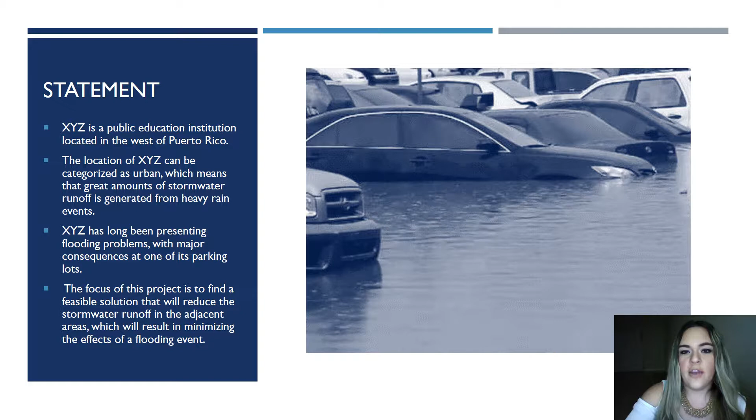Where XYZ is located is considered a dense urban area, and this is an important fact for the analysis of this problem. The objectives of this project were to determine the physical or structural feasibility of locating the green roof system on top of the existing structure, and to determine if it is economically feasible to implement this system.

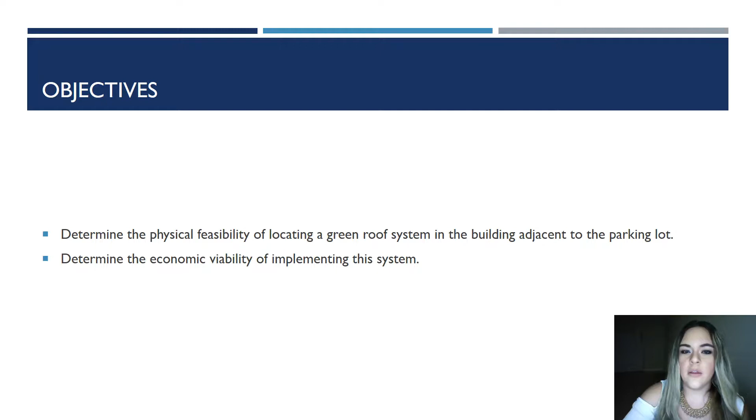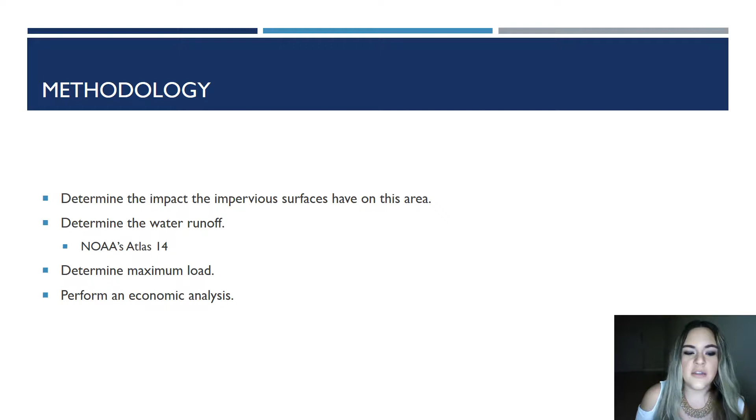The methodology that was followed was to determine the impact that the impervious surfaces have on this area, to study the water runoff, the load capacity, and to perform the economic analysis.

On this slide, the project timeline is shown, and as can be seen, we are actually at the end of the project right now.

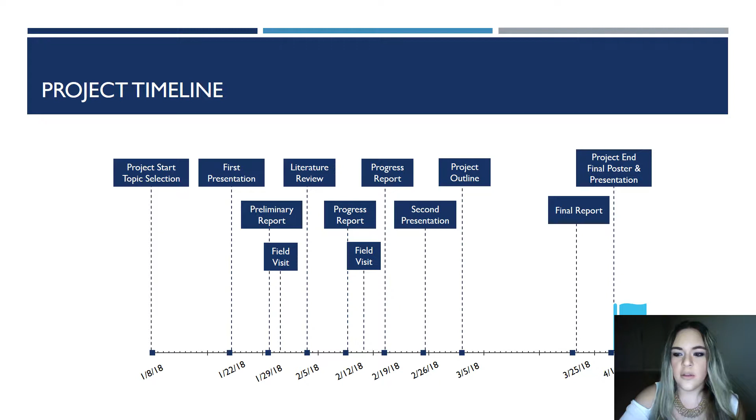As mentioned previously, impervious surfaces create a problem not only at XYZ, but this is a problem seen island-wide and worldwide, with the construction of new roads, buildings, etc. Surfaces become impervious, meaning that water cannot infiltrate through it, and this creates flooding issues. It is important that institutions start taking part in this problem and managing the water that their structure is generating.

There are many ways of addressing this problem. However, in this case, only the green roof and the rainwater harvesting systems were considered.

When a system of this type is implemented, a delay in the water runoff is created when compared to a bare roof. This is shown on this graph. A time gap between the peak runoff is created, and this happens because the water is being retained by the system.

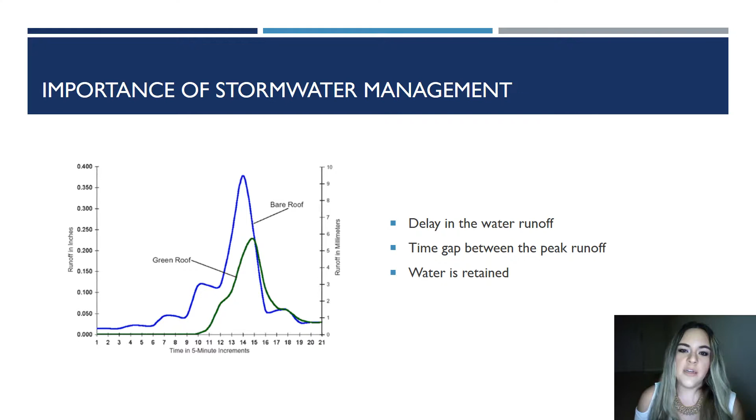As I already mentioned, the green roof and the rainwater harvesting systems were the only ones considered. A green roof is a green space created by adding layers of growing medium and soil in order to absorb, retain, and reduce stormwater runoff. It has many benefits, such as noise reduction and temperature moderation. It could be used as a recreational space, and it could be used to grow plants that could be resold, among other things.

There are two types of green roof systems: the extensive and the intensive. Intensive green roof systems require a bigger structure because they are intended to be like roof gardens and a recreational space, whereas extensive green roof systems are only for the purpose of retaining water, which was the type considered in this project.

A rainwater harvesting system is just a system that collects rainwater and stores it for later use.

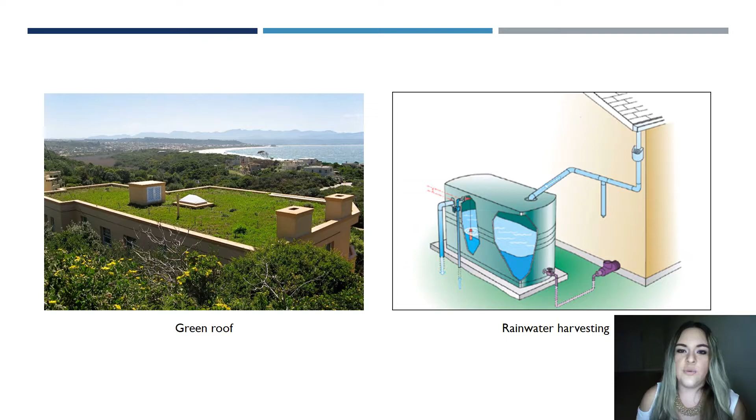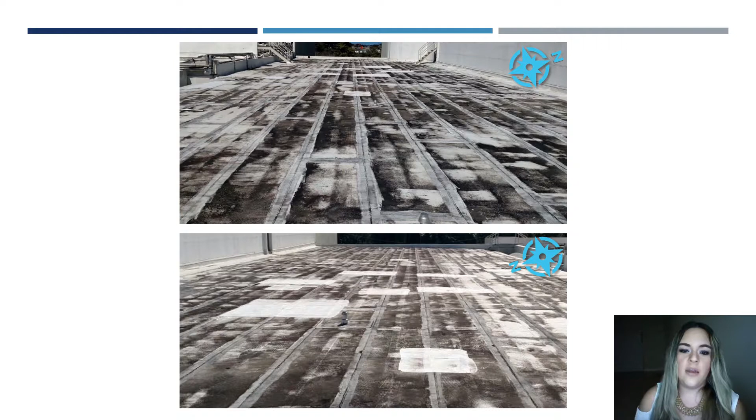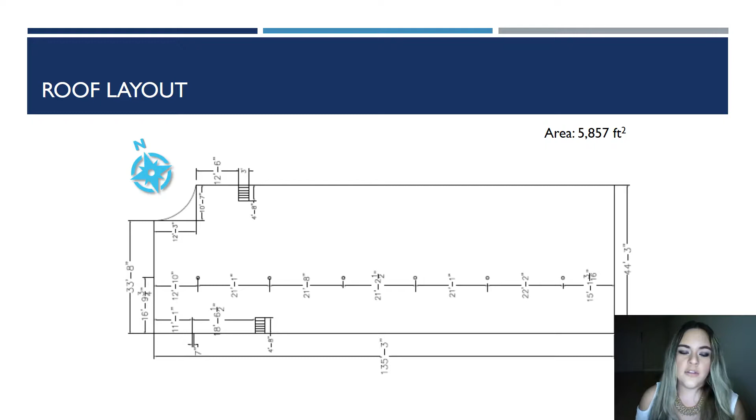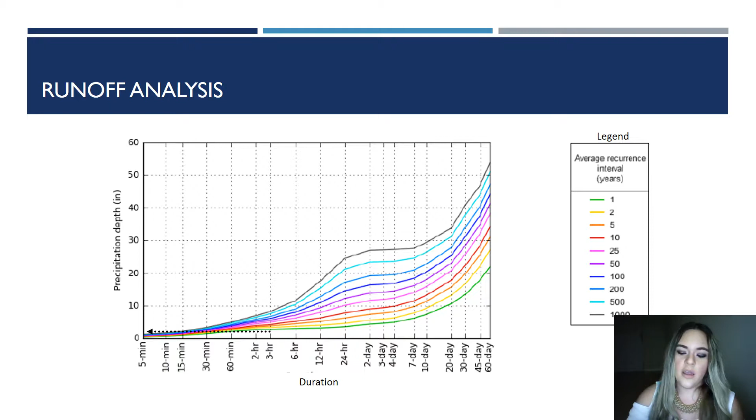It's a little difficult to see from this graph, but Atlas 14 also offers the tabular method, and for a 2-hour event, it would represent 2.62 inches of rain.

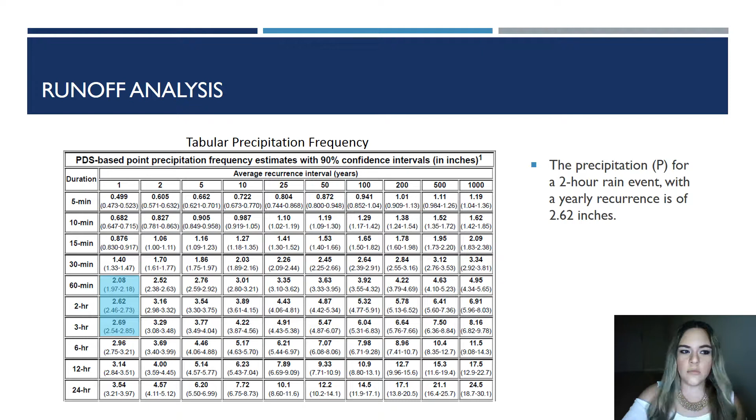A second field visit was conducted during a rainy day to measure the water retention and see how the roof was draining. It was determined that 105.6 gallons could be collected per hour. This was not very heavy rainfall, so during September and October, a lot more water could be caught.

This was based on a 50% catch of water. Based on this, the rainwater harvesting system could be used for irrigation purposes.

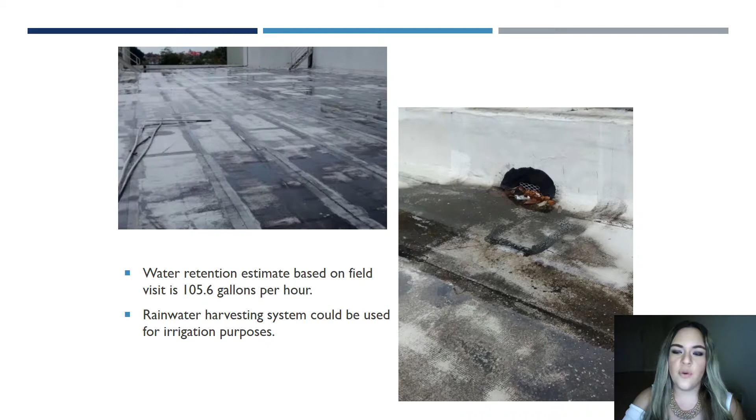Therefore, the rainwater harvesting system being proposed would use a 1,000-gallon tank that would cost $559 plus tax and shipping and handling from plasticmart.com.

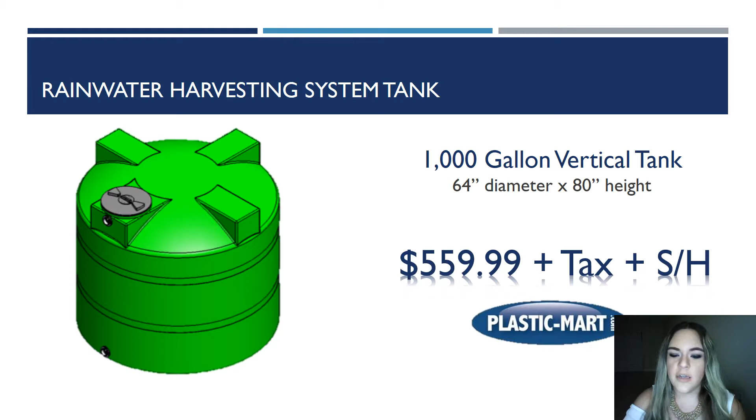The roof load capacity was carried out, and the parameter used to determine if it would be feasible to locate the green roof was the deflection. The deflection was calculated in two ways: the maximum deflection with the roof as is, and the deflection with the weight of the green roof.

The maximum deflection formula is shown there, and the value obtained was 1.43 inches for a slab of 21.5 feet.

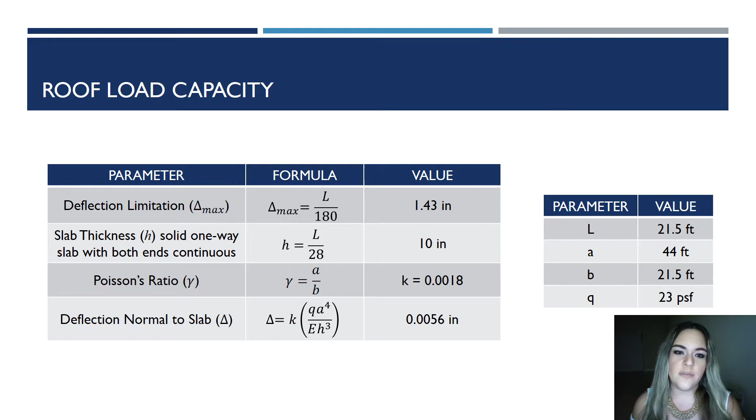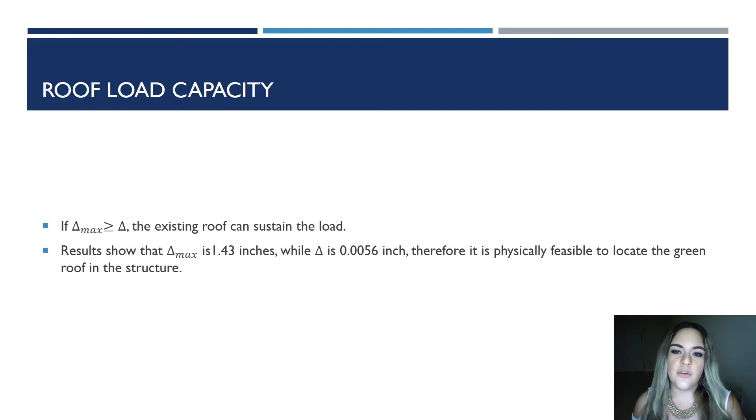The deflection normal to the slab would be the deflection caused by the green roof, and it turned out to be 0.0056 inches, which is smaller than the maximum deflection. The constraint is that if the maximum deflection is bigger than the deflection caused by the green roof, then it is okay to locate the green roof because the weight would be sustained.

The proposed design consists of an extensive green roof with a soil mix of 2 inches. There are different types of soils that could be used depending on the type of plant chosen. It would use a 2-inch granular drainage media, protection fabric of 1/4 of an inch, and separation fabric of 1/8 of an inch, made of polypropylene, with a total nominal thickness of 4 inches.

There is a local company called ASA Roofing Technology. They do green roofs, and their prices vary from $6 to $12 per square foot, depending on the materials and procedure used. Therefore, for the cost analysis, the average would be used, so $9 would be the number to use.

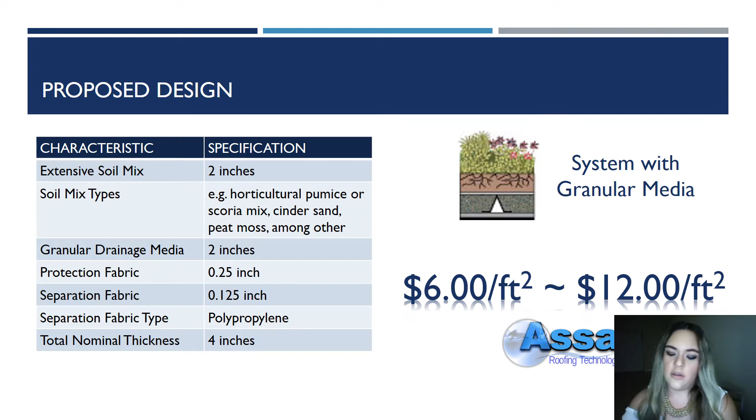The plant chosen for this project was the Sansevieria trifasciata, also known as Golden Hahnii, and locally known as lengua de vaca.

Given the dimensions of the area that is going to be covered on the roof, I estimated that they could be planted 2 feet apart, which would mean that 966 plants would be needed.

They are sold in a local nursery in Cayey from $1 to $2 depending on the size, so $1.50 would be the number to use for the calculations of costs.

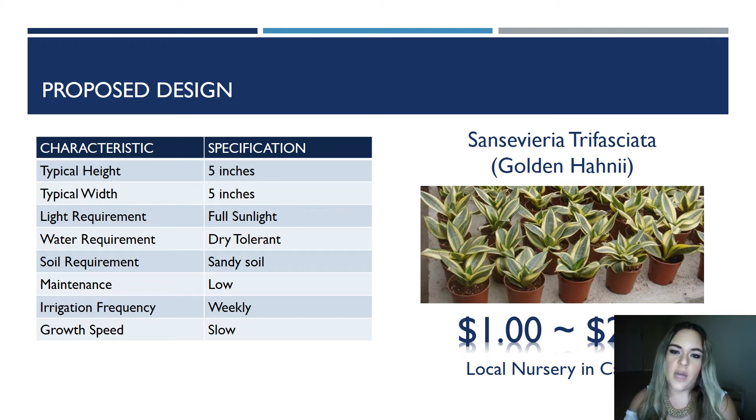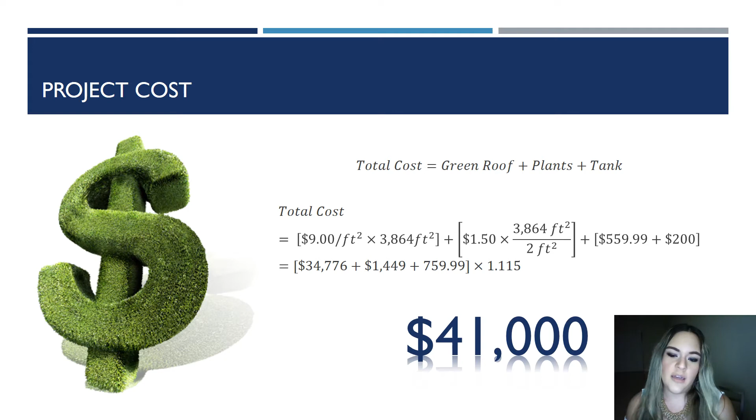So the total cost of this project is the cost of the green roof plus the plants plus the tank. The green roof would cost $34,776. The plants would cost $1,449, and the tank would cost $759. Plus tax, it will give around $41,000.

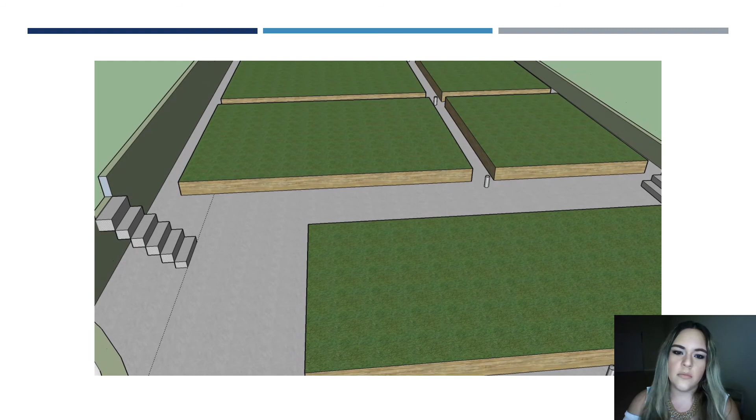So for the closing statements, this green roof system would need maintenance. There are different options that the institution could consider, such as wage labor, or it could be part of a class, laboratory, or investigation, so students can participate, and therefore the cost could be minimal for the institution.

Looking into the future, the roof could generate money if the plants would be sold. Obviously, they're going to propagate, so eventually they will need to be pulled out, so they could be sold or transferred into pots.

The institution can consider expanding the green roof area to other parts of the roof, and see if it helps even more to reduce the stormwater. It could also analyze the feasibility of turning it into a roof garden and recreational space.

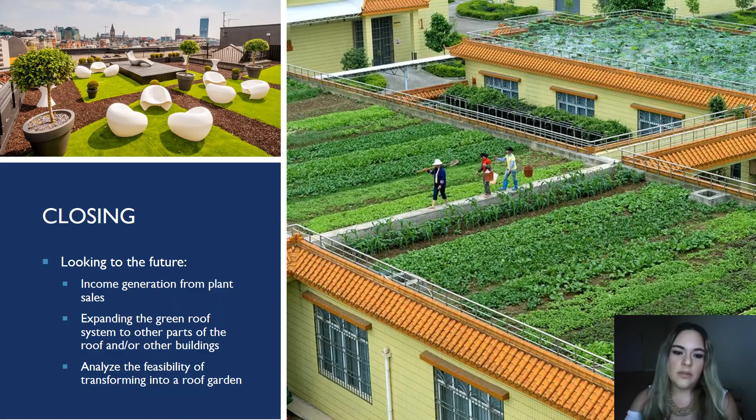So the implementation of the roof is structurally feasible. However, the budget of the institution is very limited, so the only way that it will be feasible to construct it is if there will be external sponsorship.